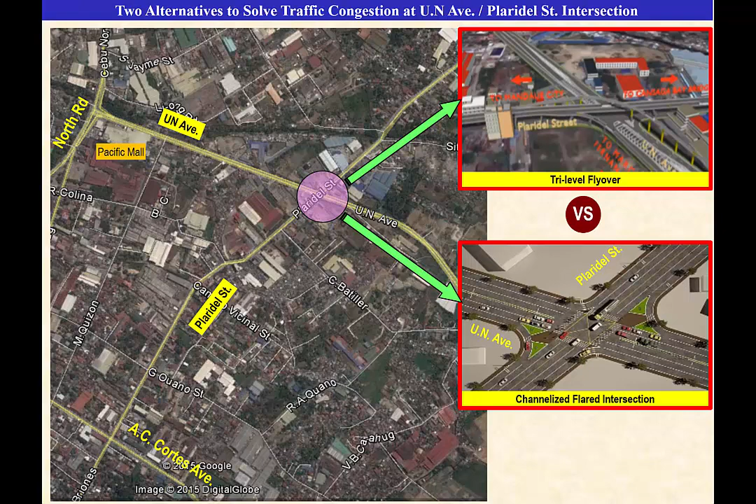There are currently two proposed alternatives to solve the traffic congestion at this intersection: number 1, a tri-level flyover proposed by the Department of Public Works and Highways, or DPWH; number 2, a channelized flared intersection based on studies conducted by Mega Cebu and the University of San Carlos.

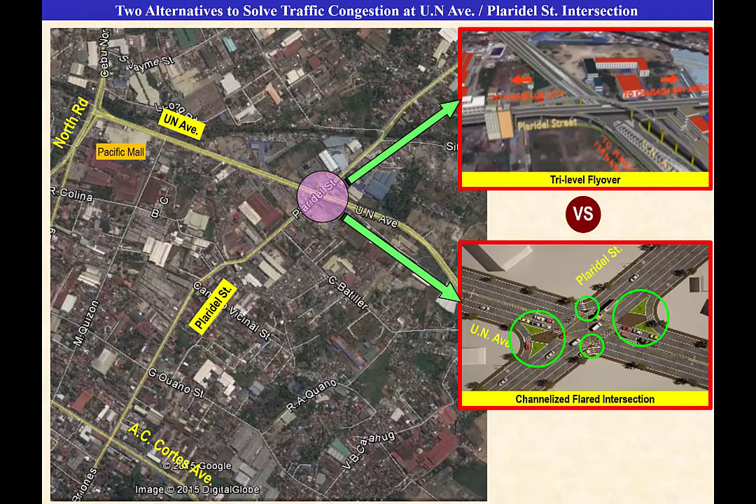Channelization entails the building of islands in the intersection for efficiency, added safety, and for providing a refuge for pedestrians when crossing. The original design of DPWH is a 4-level flyover as shown.

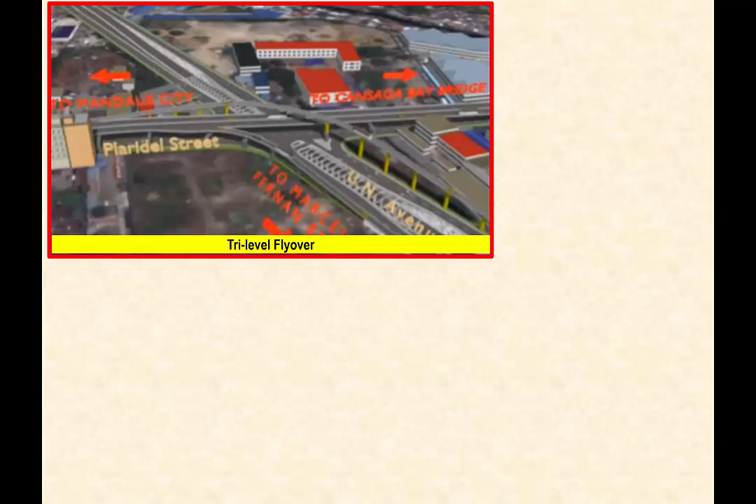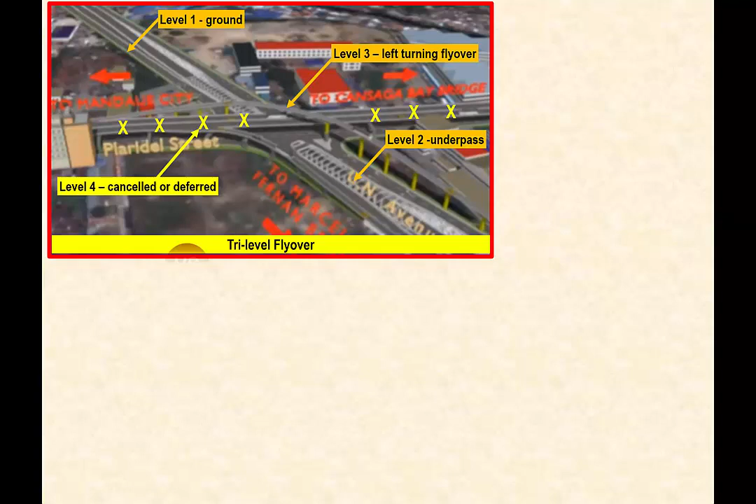It has now been reduced to a tri-level flyover by cancelling or deferring Level 4. Level 1 is ground. Level 2 is underpass. Level 3 is a left-turning flyover. The alternate design is a channelized flared intersection.

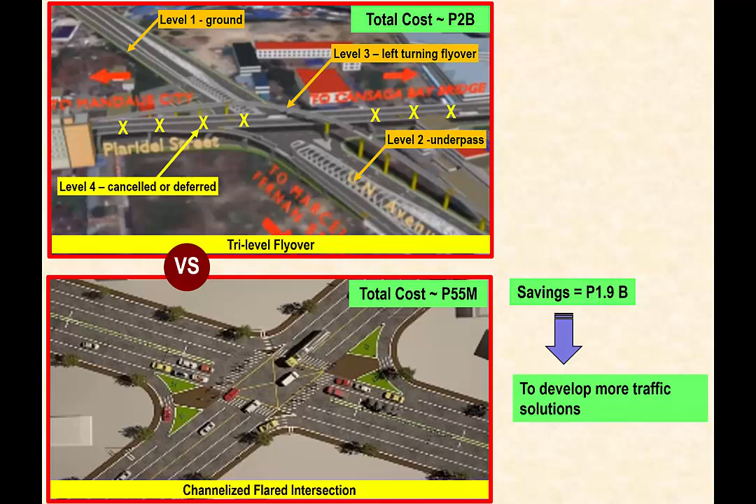The flyover complex will cost 2 billion, while the channelized flared intersection will cost only 55 million. There will be a savings of 1.9 billion, which can be used to develop more traffic solutions on a much wider scale within the vicinity of the intersection.

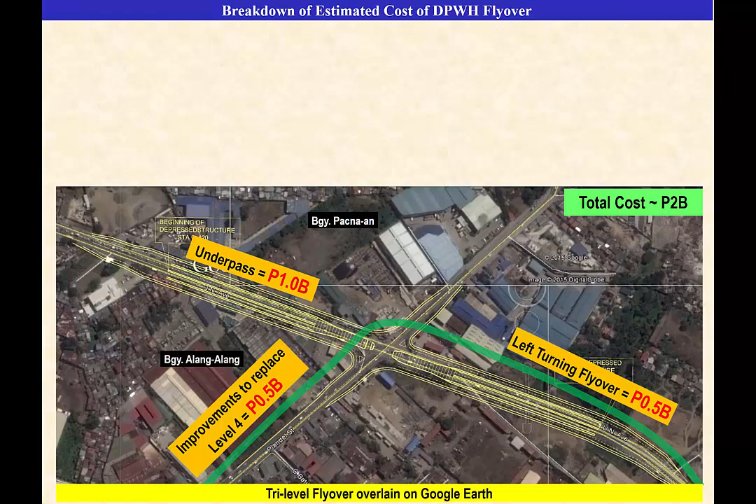The breakdown of the cost of the 2 billion tri-level flyover consists of underpass at 1 billion, left-turning flyover at 0.5 billion, and improvements to replace Level 4 at 0.5 billion.

The present DPWH tri-level flyover plan as shown has no Level 4. Level 4 was cancelled or deferred as shown in the previous slide. The Mandaue to Consolacion portion of the intersection has no improvement yet as of this plan. If Level 4 is restored or another type of improvement is made, the cost could be at least 0.5 billion.

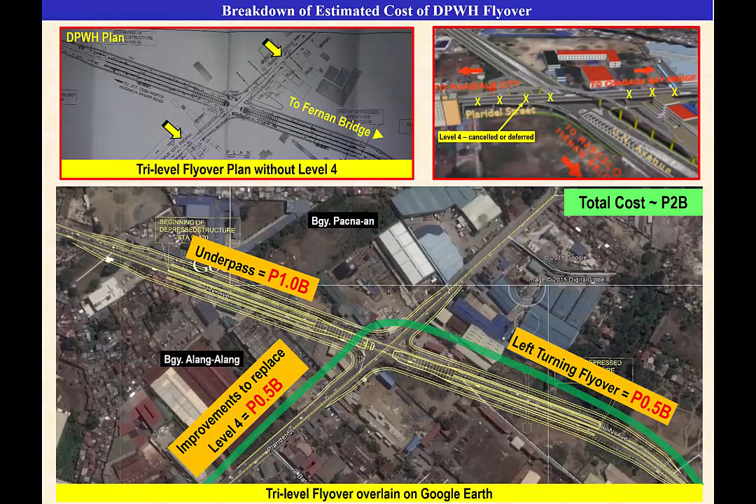The flyover is supposed to result in a smooth flow of traffic in 4 directions at this intersection, but this will not be the case. There is a traffic light at the Pacific Mall intersection 900 meters away, and another traffic light at the Cortez Plaridel intersection 1,200 meters away.

Traffic may improve in these 2 directions only if similar expensive flyovers are built at these 2 intersections. This simulation will show that vehicles will easily and quickly get stuck at these intersections, which are presently choke points.

What can be achieved by the flyover can be practically achieved by a flared intersection at 5% of the cost of the flyover. Improving traffic at one intersection in only 2 directions is not worth the expense of 2 billion.

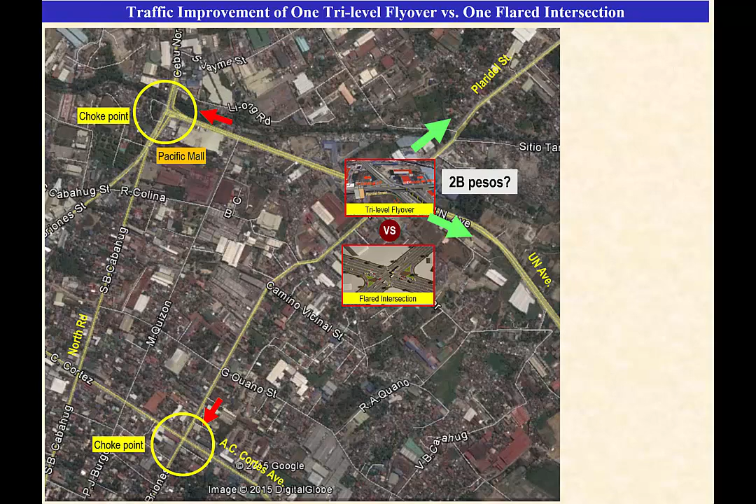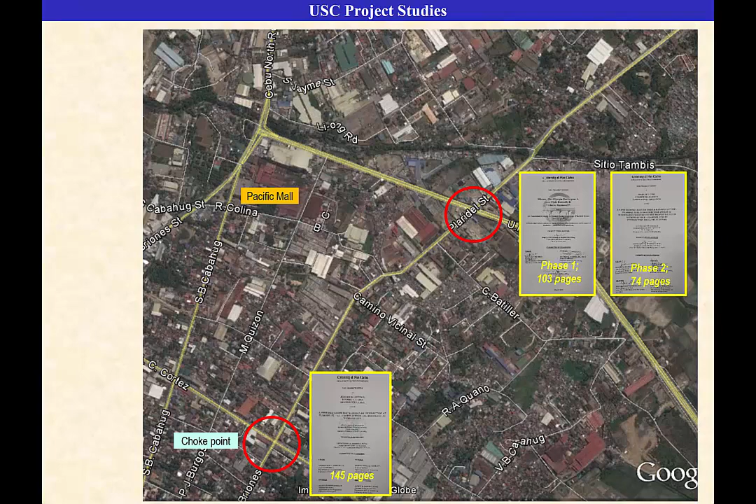Project studies by the University of San Carlos were made to solve the traffic congestion in the vicinity of the UN Plaridel intersection. Two studies have been made on the UN Plaridel intersection. To further reduce traffic in the vicinity, USC also did a project study on the AC Cortez Plaridel intersection.

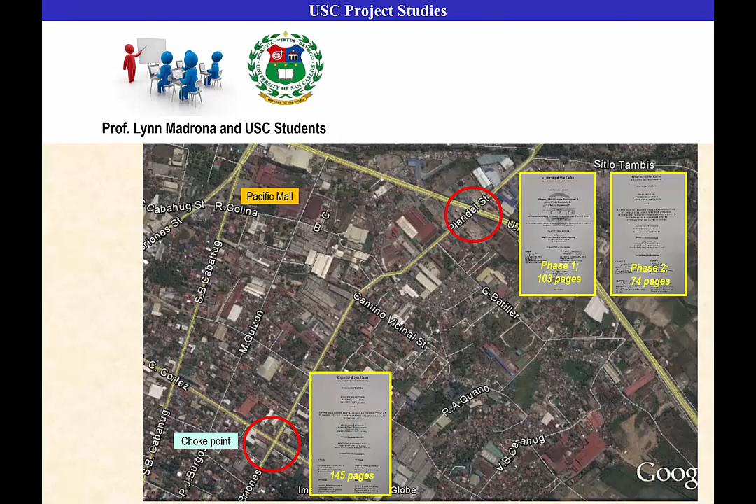These studies of USC graduating civil engineering students were supervised by engineer Lynn Madrona. She has a master's degree in transportation engineering from the Asian Institute of Technology. She is currently a professor and a reputable traffic consultant of the Cebu City Transportation Office and Mega Cebu.

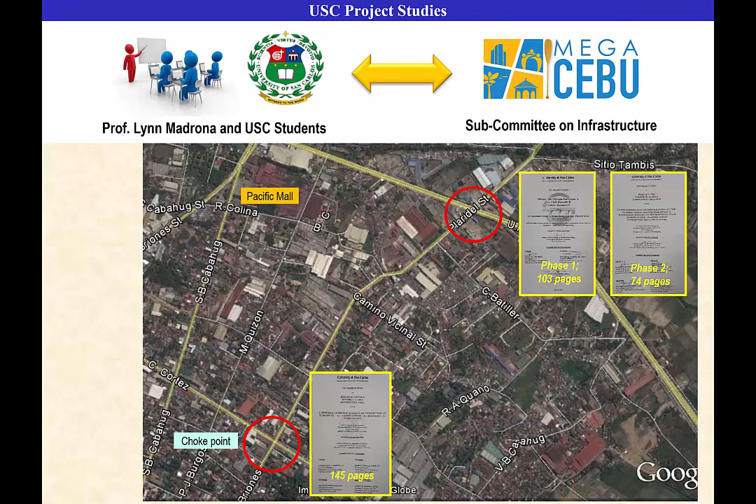The Mega Cebu Subcommittee on Infrastructure did additional studies to complement the USC studies. All studies made by USC and the Mega Cebu Subcommittee were done at no cost to the government.

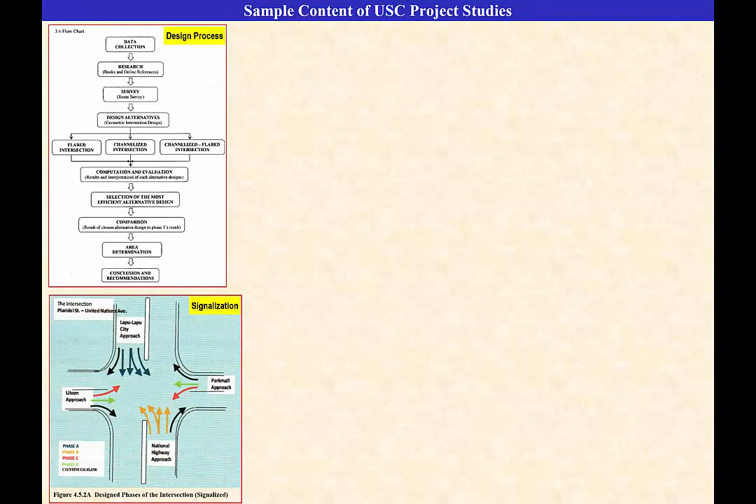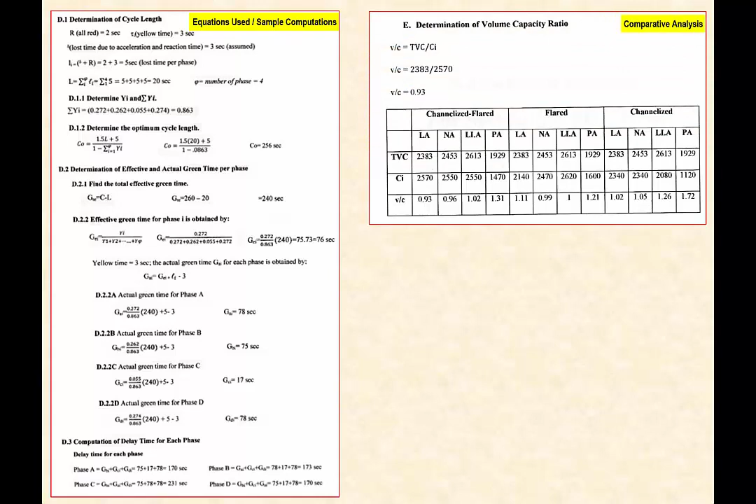These are the sample contents of the studies: design process, design of signalization, massive traffic counts, analysis of traffic volumes, equations used and sample calculations, comparative analysis, and determination of the best alternative.

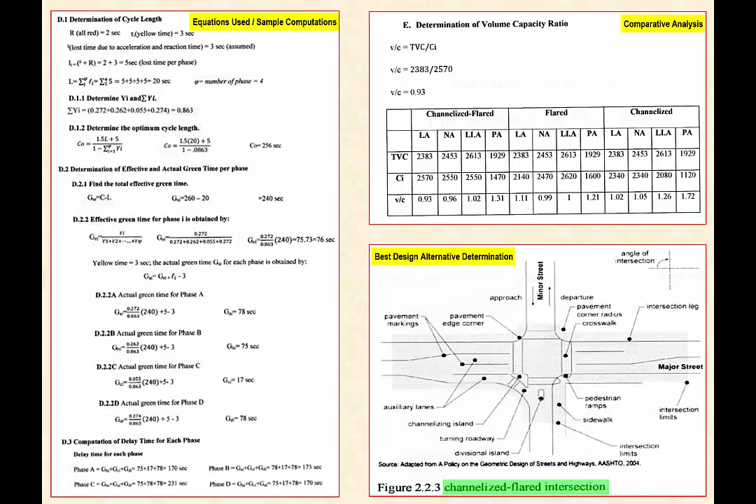The channelized flared intersections were chosen because they are as effective as a flyover and are very cheap to build.

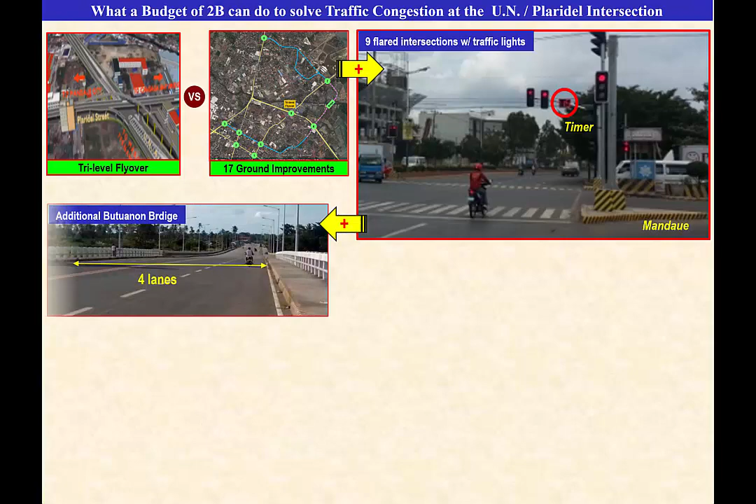This slide will show what a budget of 2 billion can do to solve the traffic congestion at the UN Plaridel Intersection. One tri-level flyover versus 17 ground improvements consisting of 9 flared intersections with traffic lights, additional 4-lane Butuanon Bridge, 20 pocket lanes, a 5.4-kilometer bypass road with bike lanes, wide sidewalks, and massive landscaping.

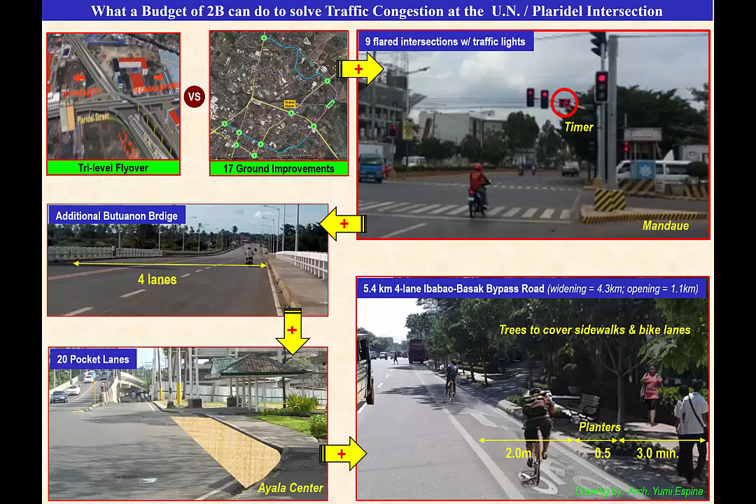This slide will show the top view features of the tri-level flyover and the 17 ground improvements. The influence area of the flyover is only here, while the influence area of the ground improvements is much bigger.

The 9 flared intersections are shown in green circles. The additional bridge is here. The road widening is shown in this blue line. A shortcut option is shown in this dotted blue line.

It will have lower construction cost but higher ROW cost. The road opening portion is shown in this pink dotted line.

50% of this road length for a 4-lane road has already been donated by the lot owners to the city of Mandaue 15 years ago. This road alignment is mostly a barren area with very minimal ROW problems, which makes the completion of this road opening much cheaper.

This is a typical layout of a flared intersection. From a 4-lane road, it flares into at least 6 lanes.

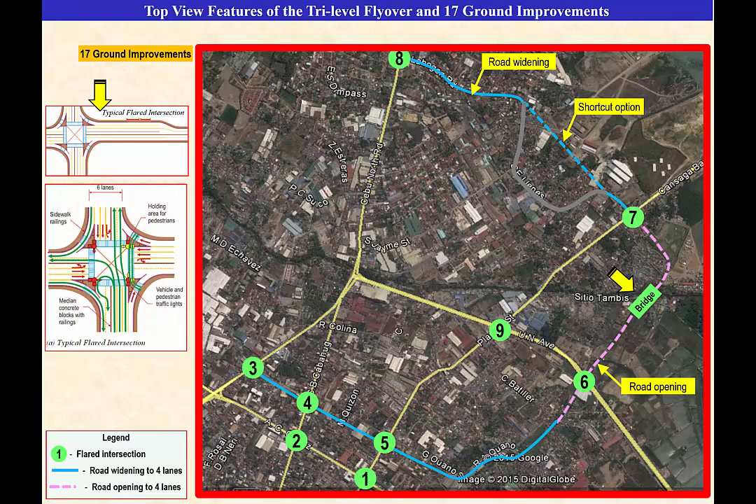This is a close-up view of the intersection. All travel directions will be made available for movement.

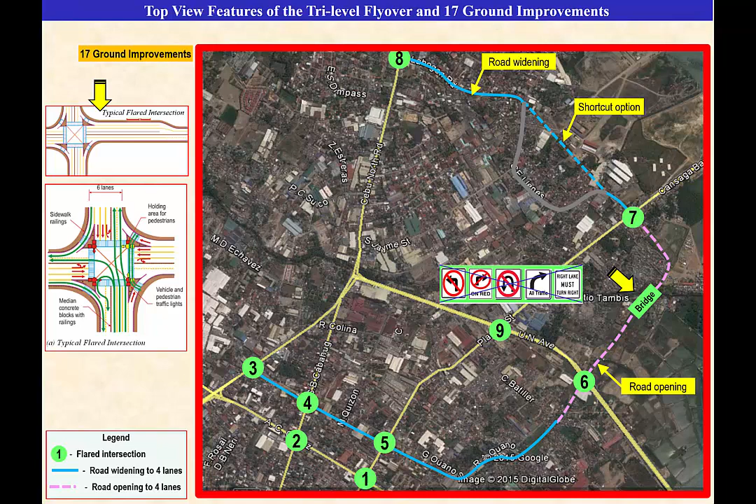There is no need for some restrictive signs like these at the UN Plaridel intersection. These kinds of restrictions are increasingly becoming common in Cebu, worsening traffic in some areas.

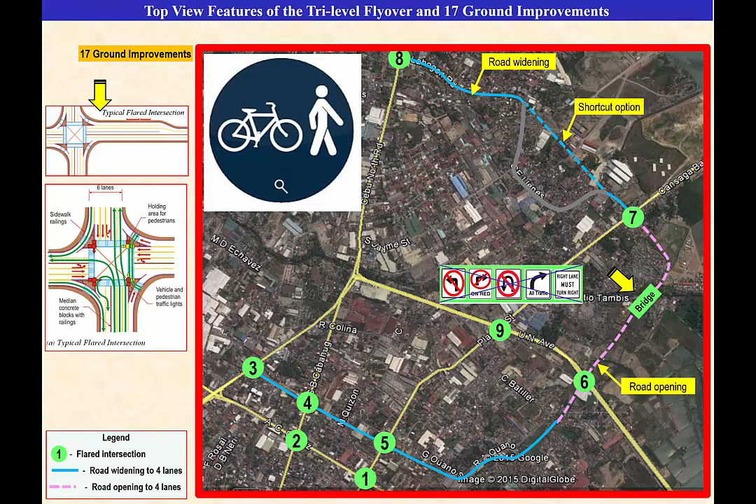Tricycle and jeepney rides will be reduced because of the convenience of biking and walking options.

This table shows the cost details of the 17 ground improvements, including the payment cost of acquiring the land right of way.

Payment cost of the buildings that will be hit. The construction cost. The total cost of the ground improvements.

The tiny numbers on the left of these columns are the rough calculations on the land ROW cost and construction cost.

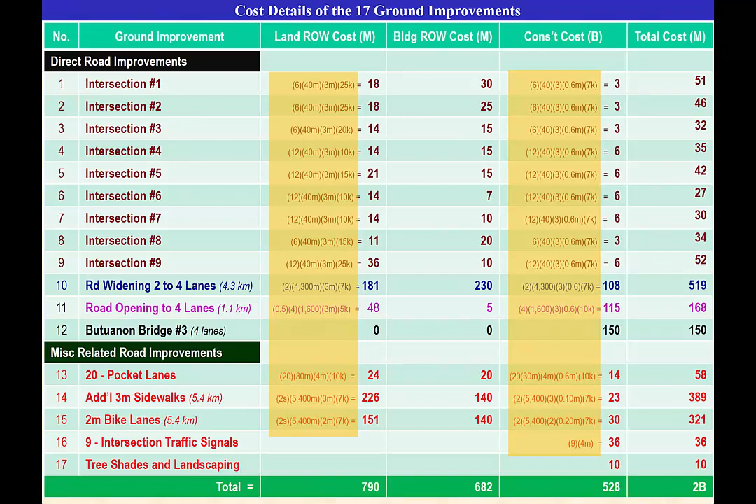The breakdown of the cost of the ground improvements is as follows. Land ROW is 790 million. Building ROW is 682 million. Construction cost is only 528 million.

The total of the ground improvements is 2 billion, which is equal to that of the flyover.

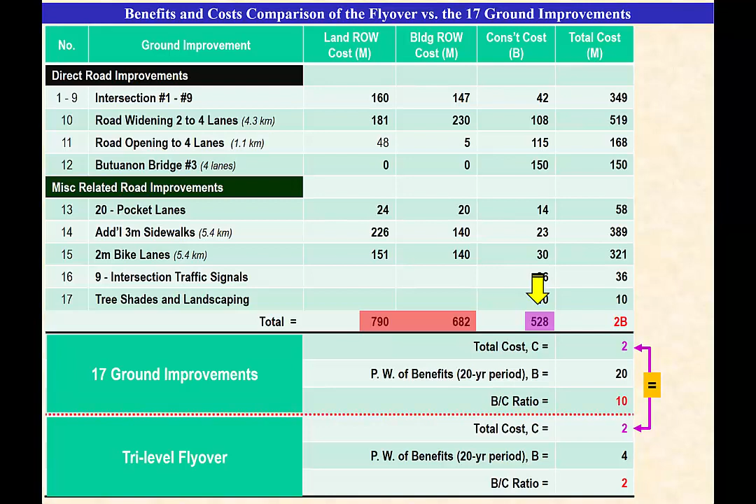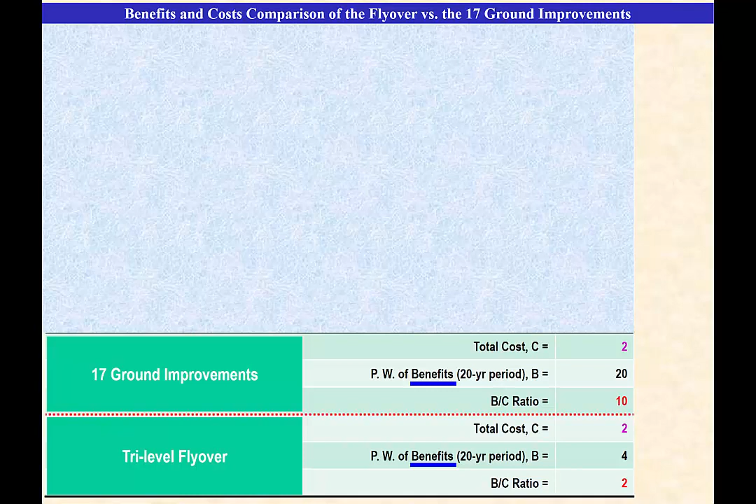Let us estimate the benefits of each alternative. The numerical calculations of the benefits can be done in a later study. While this data is not yet available, numerical estimates will be made here to explain the procedure of the benefit cost analysis.

For the ground improvements we have savings from lesser fuel and operational cost, savings from lesser health cost due to lesser pollution, savings in time and production output as time saved is money earned, money derived from increased investments due to better infrastructure, increased taxes from increased realty values and increased employment, and other multiplier beneficial effects.

For the flyover, we have a high side estimate equivalent to 20% of the above.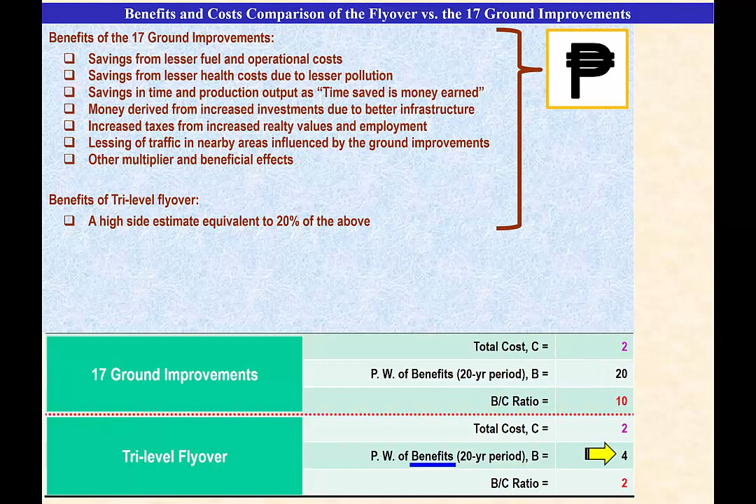All these benefits can be monetized into pesos. For the ground improvements, the benefits are estimated to be 20 billion over an assumed 20-year period. For the flyover, it is estimated to be 4 billion.

Now let us estimate the benefit cost ratio of each alternative. The benefit cost ratio for the ground improvements is simply B divided by C equals 10. Similarly, the benefit cost ratio for the flyover equals 2. Comparing the benefit-cost ratio for both, the ground improvements alternative is 5 times better than the flyover.

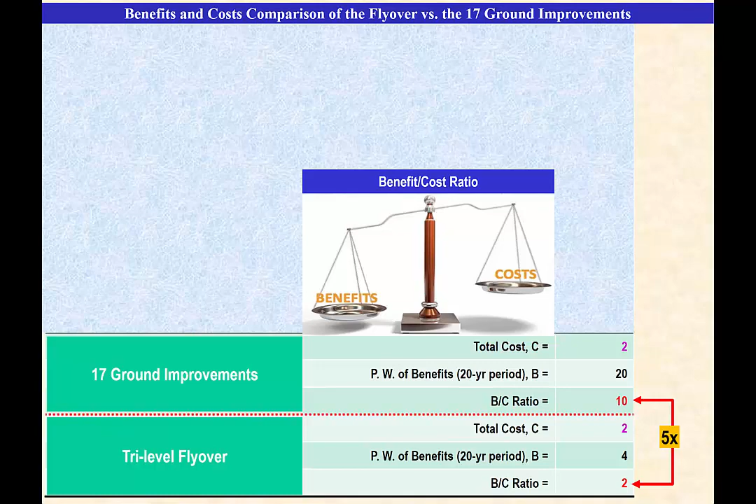Let us look at the comparison of the ROW cost and construction cost of the two alternatives. For the 17 ground improvements, the ROW cost of 1.5 billion is 3 times greater than the construction cost of 0.5 billion.

For the flyover, it is radically the opposite. The construction cost of 1.9 billion is 19 times greater than the ROW cost of only 0.1 billion.

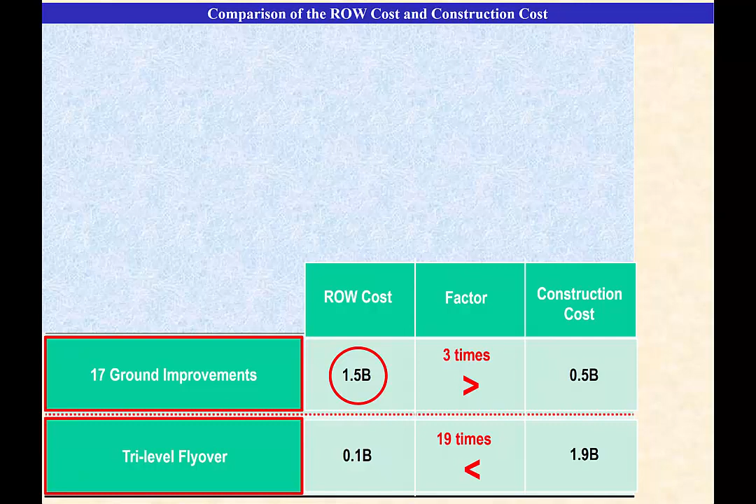The enormous ROW cost of the ground improvements at 1.5 billion is not a big problem. The cost to the government is like an investment. The government can recover the investment in just a few years based on the enormous benefits mentioned previously and above.

Another example is from point C to point D. The result is the same.

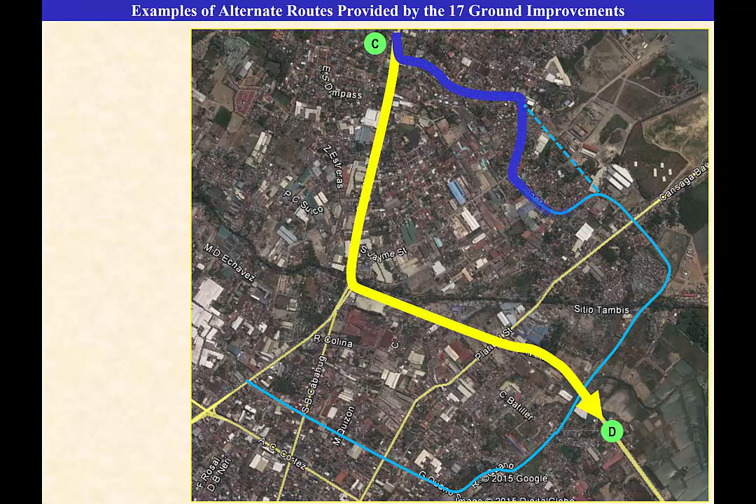This slide will demonstrate the massive transfer of traffic from congested roads in the vicinity of the intersection to the alternate road. The thick yellow lines represent congested roads, while the thin and dotted blue line represents the alternate road.

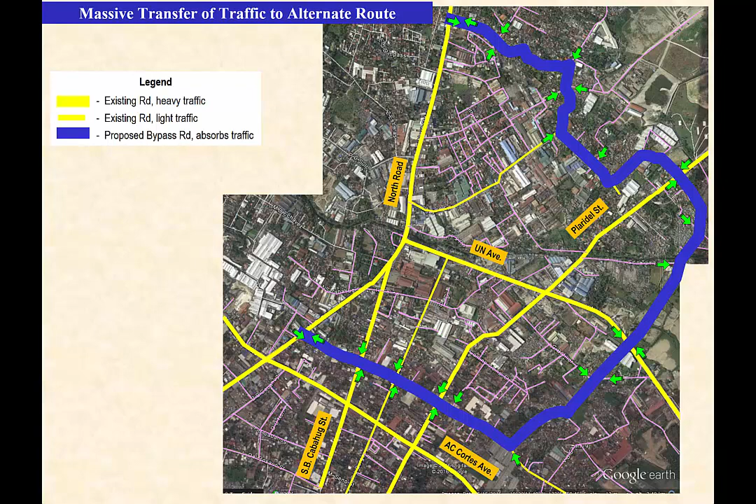If the alternate road is built, at least half the traffic in the congested roads will transfer to the alternate road. From major and minor roads, drivers will tend to use the new road because it is more efficient and better designed. They can arrive at their destinations earlier and at lesser cost. Note that the thick yellow lines have become thin and the thin blue line has become thick.

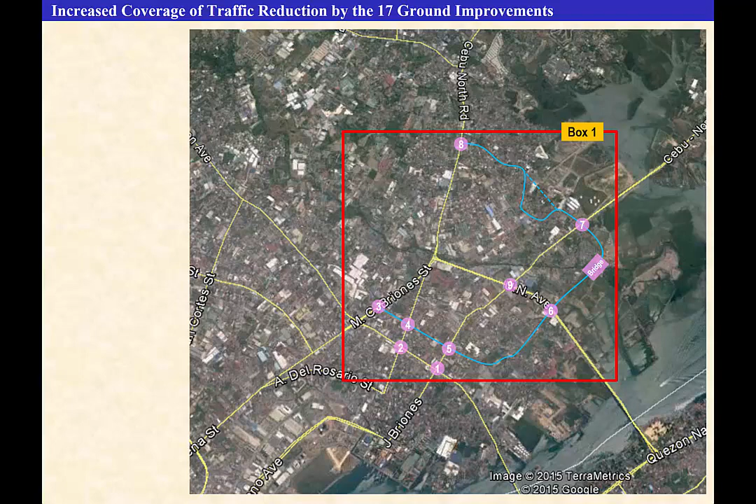This slide will show the increased coverage of traffic reduction by the 17 ground improvements. Traffic will not only improve in the immediate vicinity of the ground improvements enclosed in Box 1, but will be improved even more on a wider scale enclosed in Box 2.

All vehicles will want to travel from A to B. Beyond Box 1 are vehicles marked by green arrows wanting to go to their desired destinations. They can easily get through Box 1 because of the ground improvements, arriving at their destinations much faster and reducing the number of vehicles at the congested roads. This is especially important during peak hours.

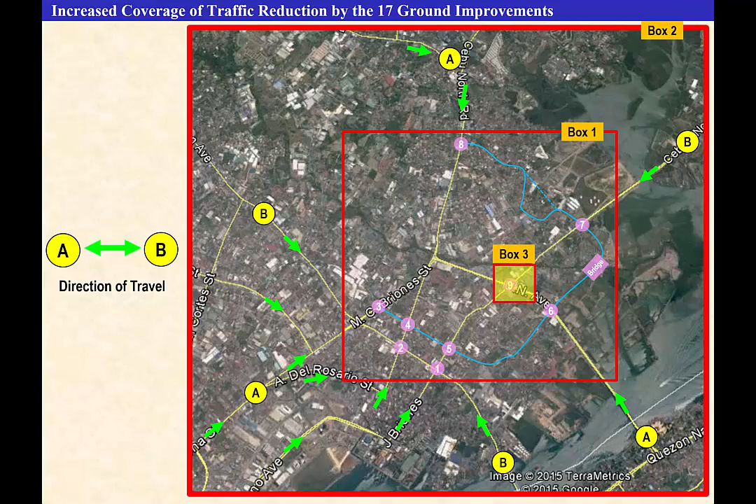Such improvement cannot be achieved by the smaller influence area of the tri-level flyover.

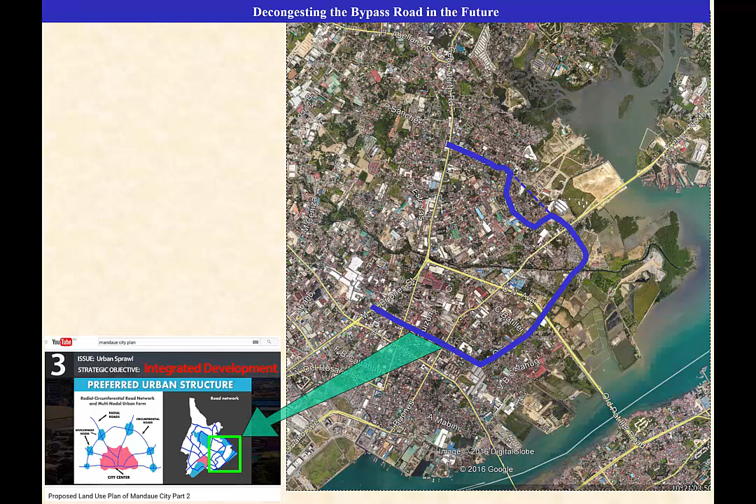This slide will show how the alternate bypass road can be decongested in the future. A screenshot of Mandaue's master plan posted on YouTube is shown here. This alternate bypass road is almost exactly the same as that of Mandaue's proposed bypass road.

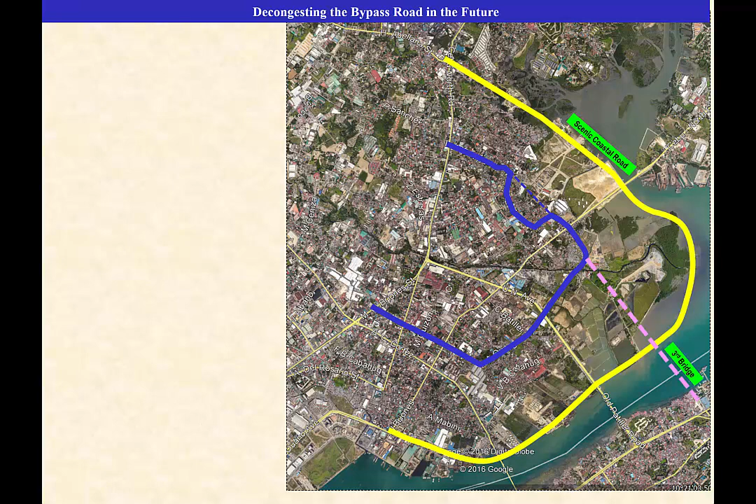In the 2015 JICA roadmap study, a coastal road is proposed. This road and a third bridge are plotted on this map.

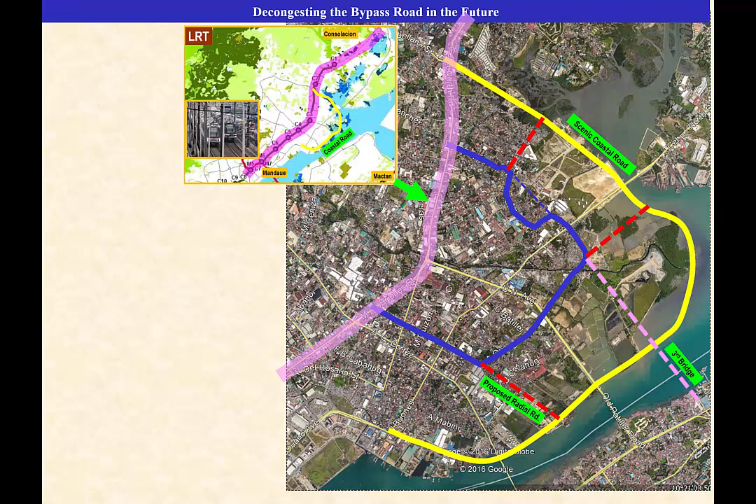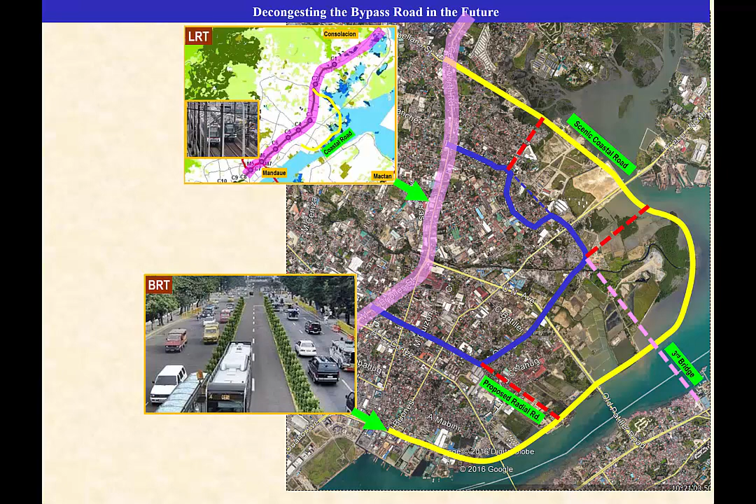When the alternate road becomes congested 5 years after its completion, radial roads can be constructed towards the coastal road. When the coastal road becomes congested 5 years after its completion, it can be decongested by the JICA proposed LRT from Carcar to Danao, or a BRT line can be built in the middle of the wide coastal road. We can really avoid future traffic if only we plan ahead.

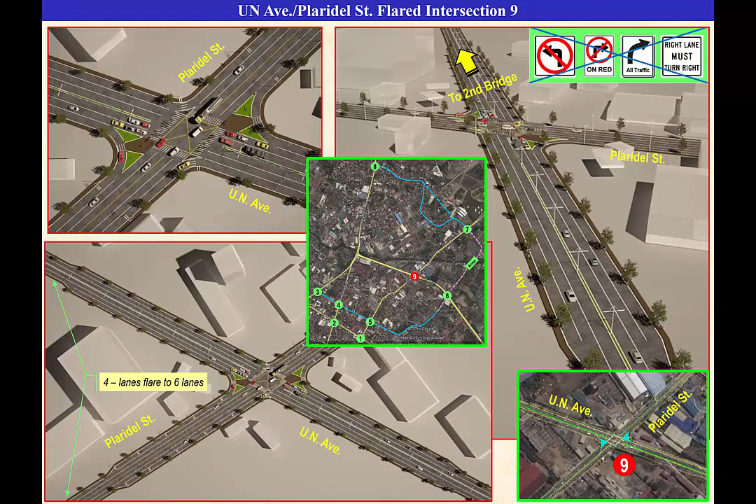This slide will show the drawing details at intersection 9, the location also of the tri-level flyover. There is no more need for restrictive signs. At the intersection, a vehicle can go in any direction quickly.

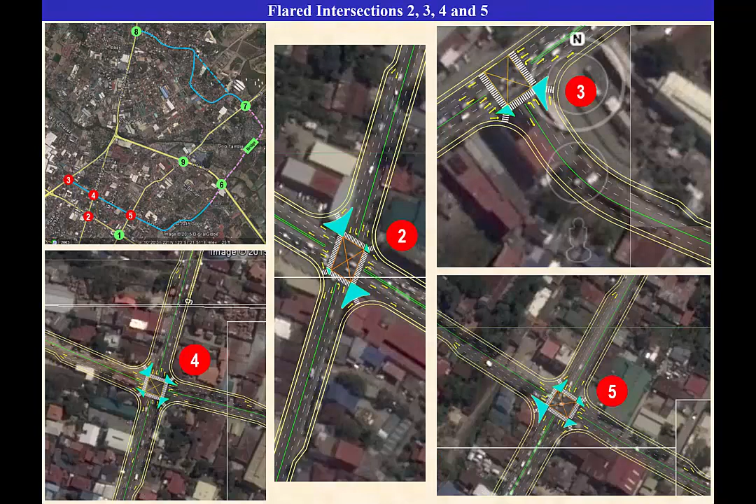This slide will show the row requirements of both the tri-level flyover and the flared intersection, with a zoom view of the core of the intersection. The ROW outer limits required for the flyover are marked in orange, while the ROW outer limits required for the flared intersection are marked in yellow. The flyover row is only slightly wider.

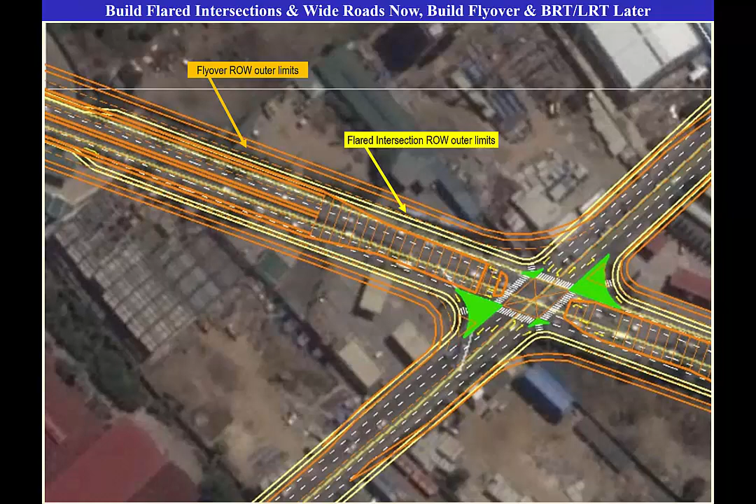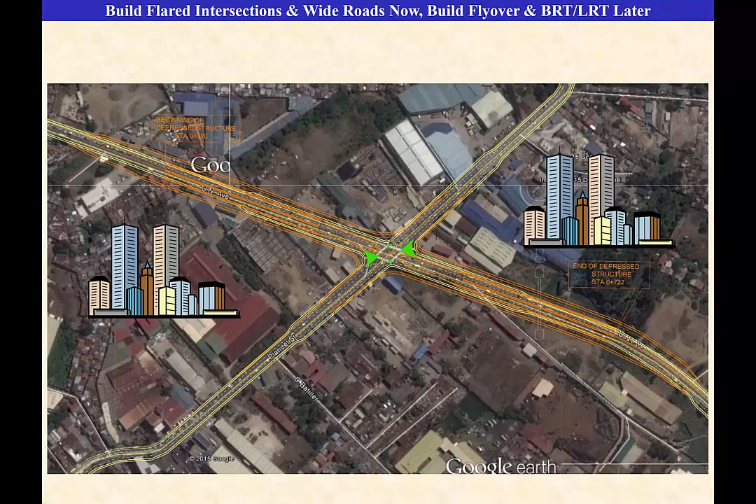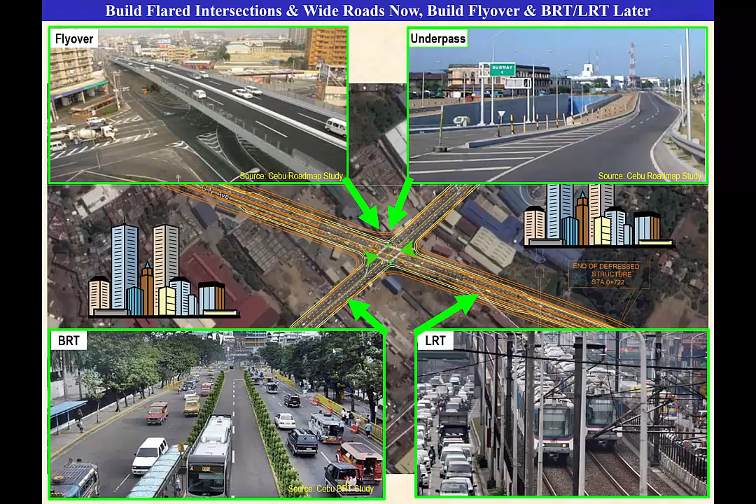An option would be to build a slightly wider flared intersection now for future use. Within a span of 10 years, buildings will be built in the vicinity and traffic will gradually increase to become very heavy. With wide roads and intersections, flyover, underpass, BRT, or LRT can be easily built without the need to acquire additional row.

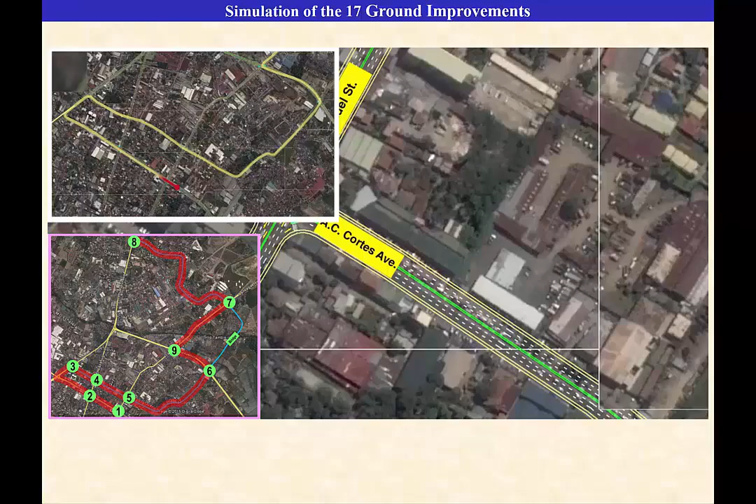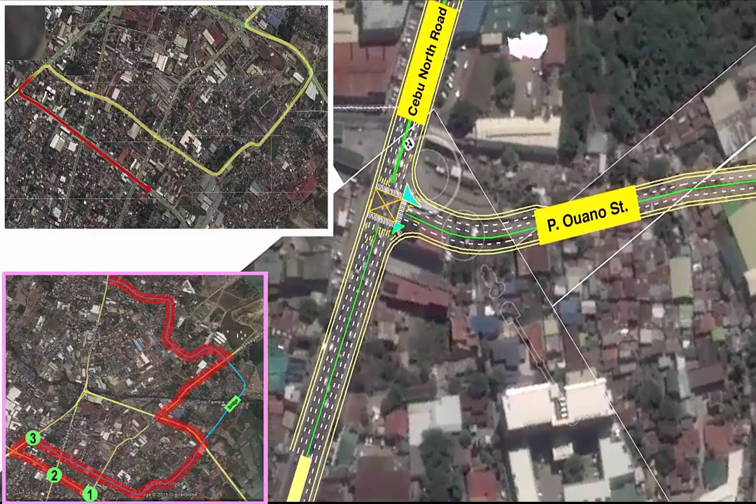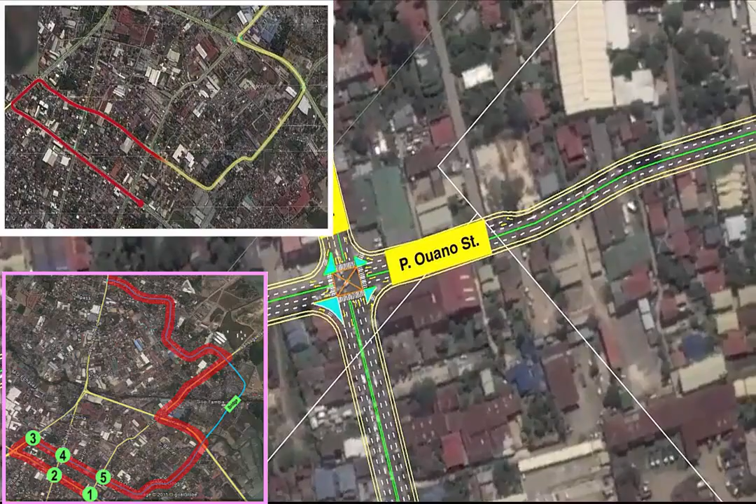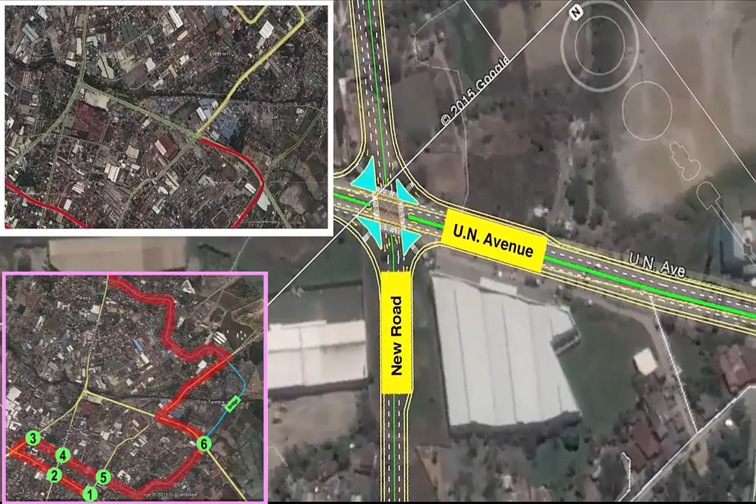Intersection 1, 2, 3, 4, 5, 6, 9, 7, 8.